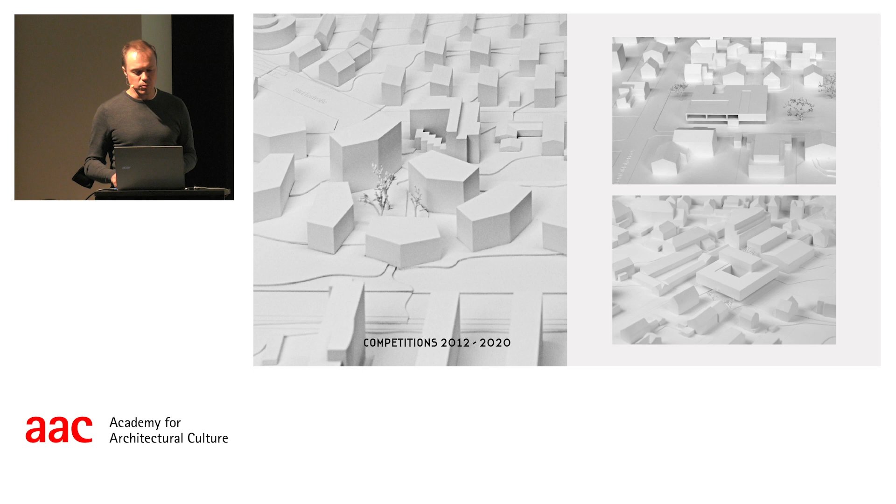We also like to do bigger things, so we enter competitions. We're not really specialized in kindergartens or offices—if it's interesting, we like to do it. Fortunately we've won some in recent years. One was the Patscherkofelbahn in Innsbruck, which was, I'd say, the first international competition we won, and from that point it turned and got easier in a way to get invited to things.

I'll show that one too because it fits the topic we have here tomorrow. Also the Kunstraum in Kassel, our first project in Germany—I was at the site this morning, so they've started building now, and it's also an interesting project for us.

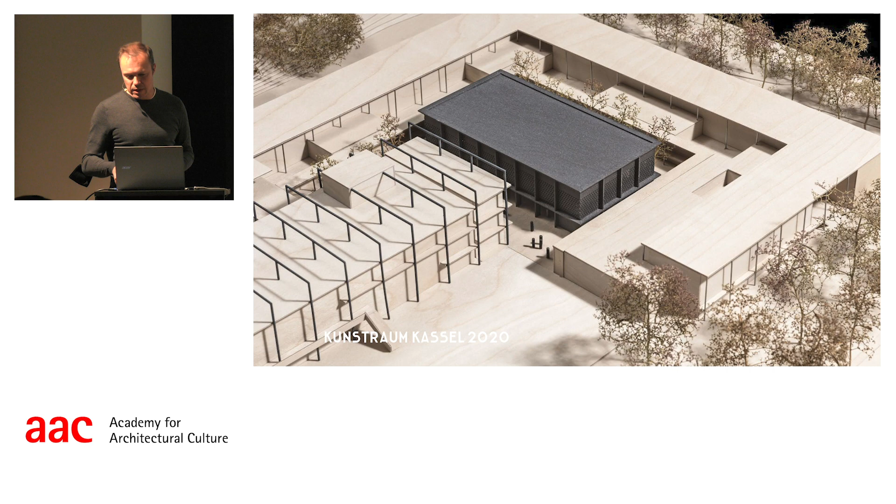So that's the topic of the lecture: in daily work we always feel that we are somehow between two poles, and our goal is to find the balance between these two extremes, to find the medium, and that leads us to lasting architecture and a high level of design if possible.

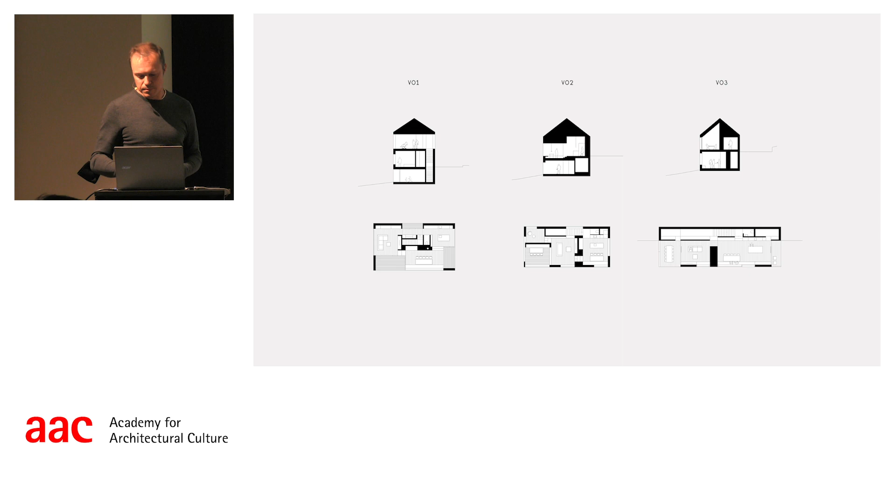We also tried to use the hill, the terrain, to deal with the terrain. That's also not so easy without the model. It's really important to make models for that, because it shows the truth, if it's working or not. And yeah, we tried to use that for us.

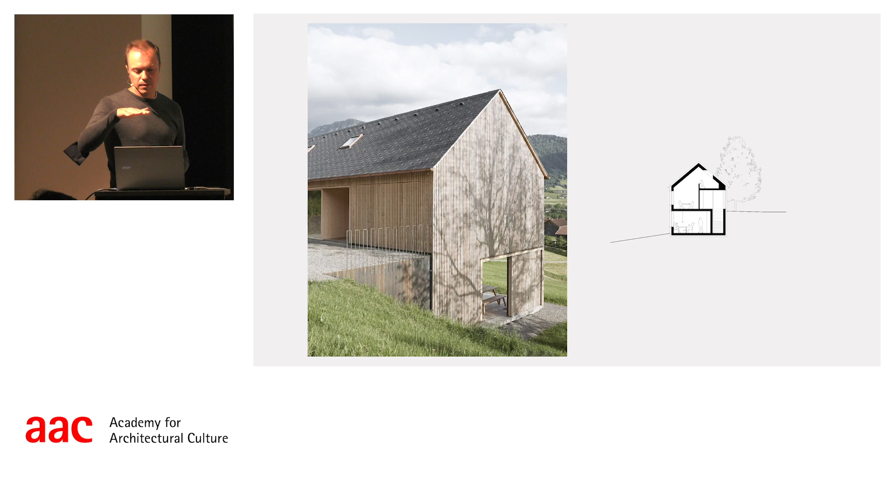So if you come inside the building, the entrance is on the top floor, and if you go to the next top floor, there are the rooms for the children and for elderly, and garage and things like that, and the corridor separates it a little bit, because the Schwiegereltern are living up there, and that's things like that you have to react on.

There's this gallery to open the relatively small rooms to the top.

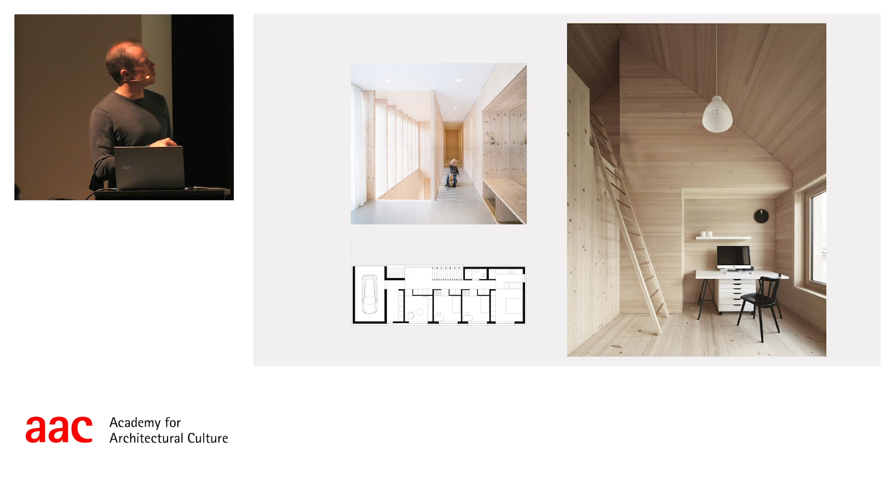The floor downstairs is pretty simple, organized again with this open space. There's an oven which separates this space. This oven, heated by wood, is actually the only heating we have, because these houses have so, I don't know, 20 centimeters of insulation, and in summer you don't need anything, and just in really cold days in winter there's this oven, and we made pipes which bring the warmth into the upper floor like in traditional houses 200 years ago.

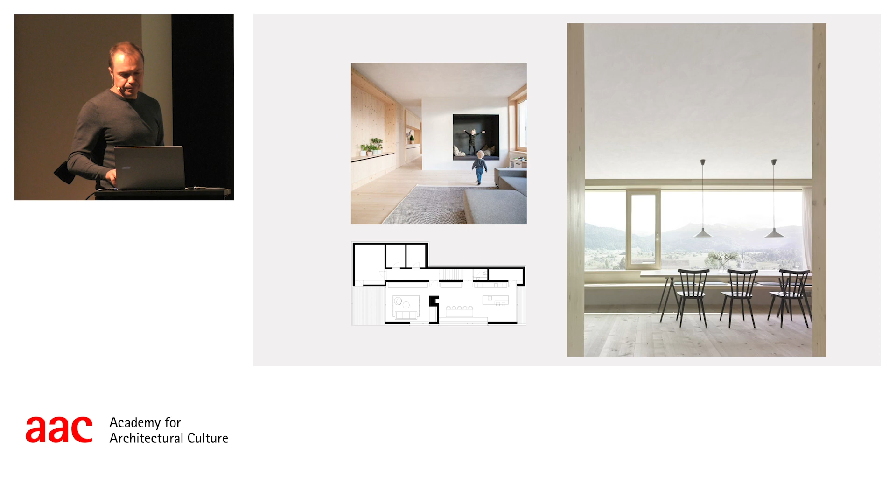And luckily the client had his own wood, so we had a lot of wood to work with. That allowed us this experiment with the facade. So we wanted more than just a protecting shell. The facade should be more like an ornament, more a little schmuck, and that makes this fine character in a way of this house.

And if you cut the wood at the right moon sign, then you can use it for almost everything. We used their own wood for construction, for furniture, for windows, for almost everything.

Also for the floor, that was the biggest discussion, because we wanted the floor completely raw, no oil, nothing, and that was really hard, but we won, and we got that floor. And what's really interesting is that now they really love this floor, because it's their own floor. You see all the bumps and things like that where the kids played or where the kids ate. There's a little bit of dirt, and with the years it's getting, the first year is not so easy, but then it's getting better and better every year, and now that's their pride. What they show first is the floor.

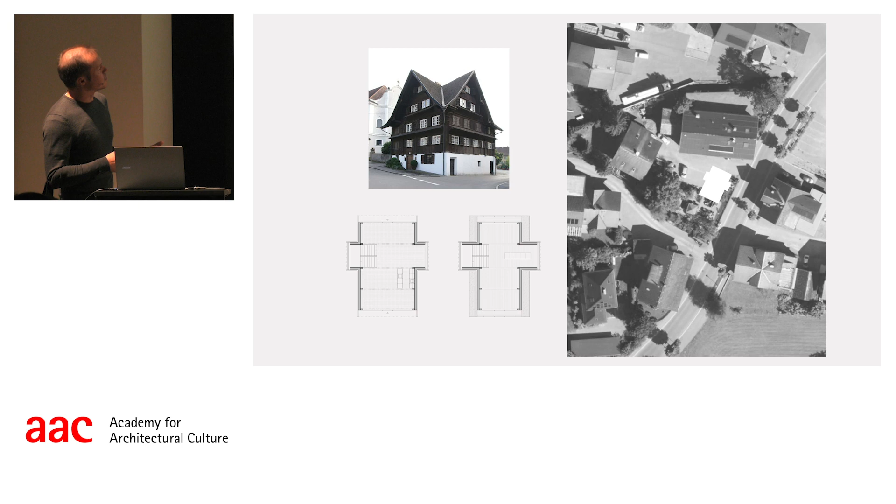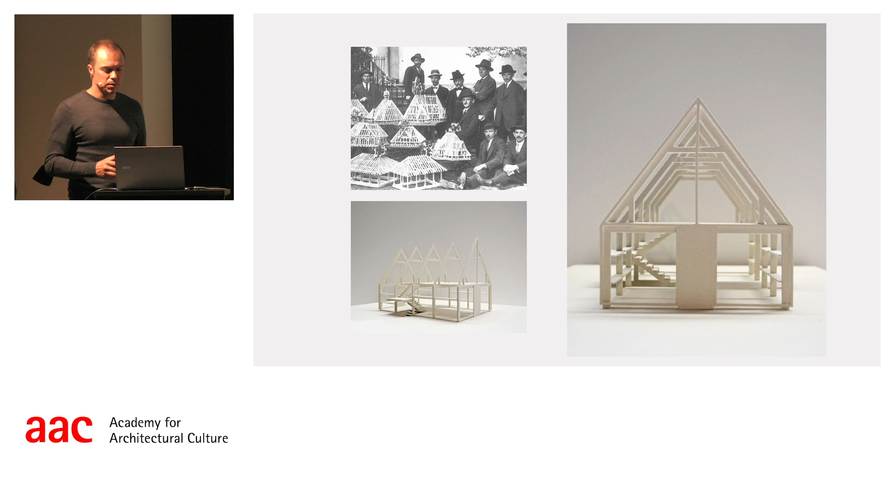What we also did is try to make it out of only cut wood, so no glue and things like that. It wasn't easy to realize because nobody is used to it anymore. So it started with the static construction and also with the carpenters, but it was a little bit difficult from time to time.

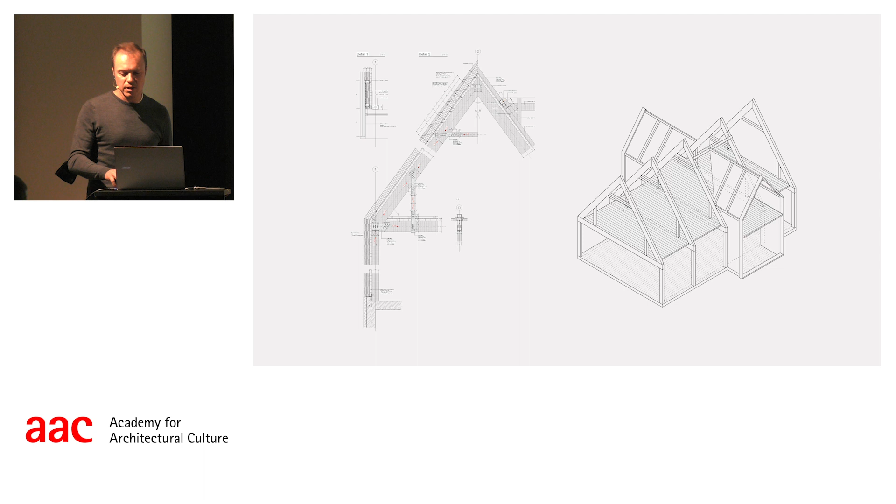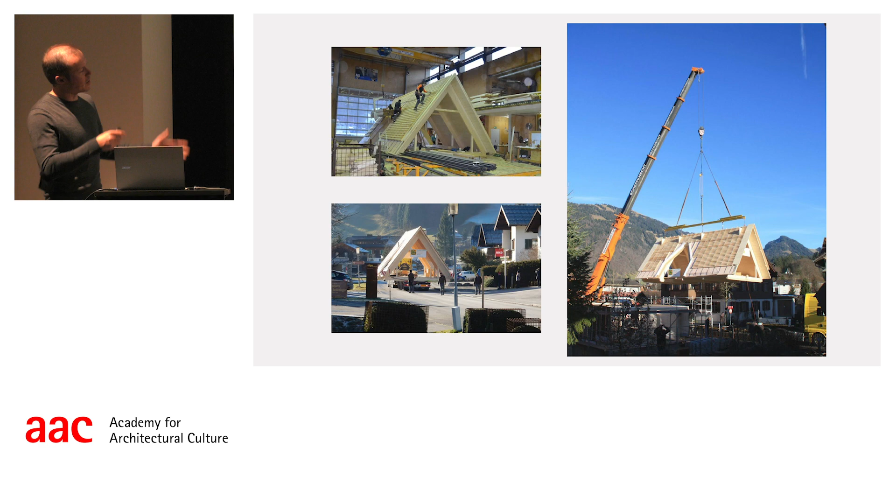And then it's finished—I think it's clear what these pictures say here. The facade is made of fir, and on the inside all the materials are completely raw again, except the steel, which is oiled. The floor is just concrete, and all the other stuff is completely raw. The connections and so on were not so easy, but it ended up really good and worked.

The Alpine Chapel was for us not a typical architectural project, I would say. It was more really hard on an interpersonal level.

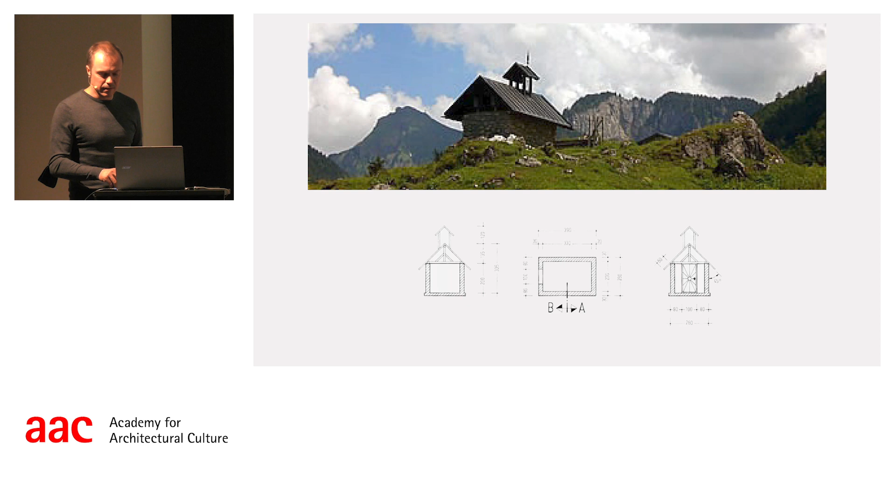That was the chapel of this Vorsäß, Wirmboden. It was built by one of these farmers in the 80s without asking the others. And in 2012 or so, an avalanche came and just blew away the chapel, and also one of these buildings was destroyed.

Here you can simply see why: here was the chapel he built on his own, and here's now the new site. He just put it there because, you know, these are all farmers, so it's not easy between all of them—he was only allowed to build it here, not somewhere inside the settlement. Since he built it outside of this naturally grown structure, it was just a matter of time.

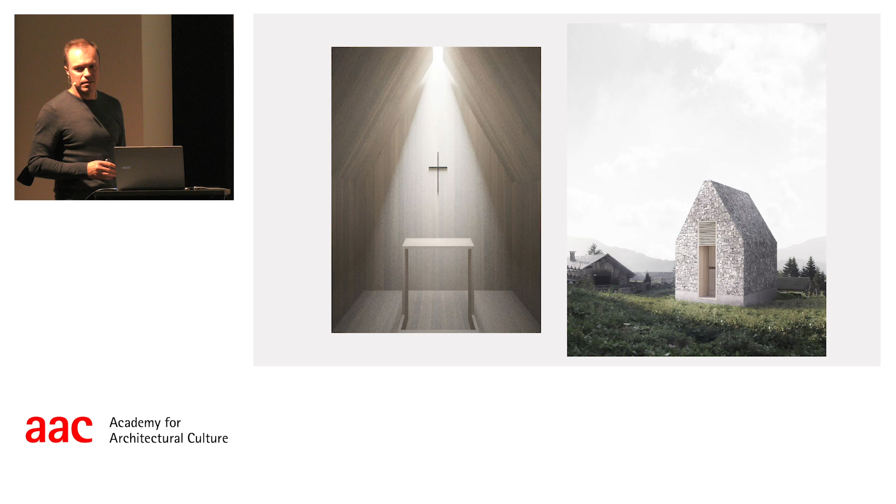So they asked us, I don't know why, to design the new chapel, and we were full of enthusiasm and also a little bit full of naivety, I would say. We wanted to make a real architectural icon up there, and that was the first design: an inner shell of wood with collected stones outside, light from above, a really clean, beautiful thing up there.

Then we had the presentation. We really made this model and things like that, and we had a really good feeling at first, like usually. But you could already see the groups among the farmers—some were pro and others were contra.

After a month or so, we heard nothing for two months. Then we heard rumors that they wanted to build a concrete bunker up there instead, which isn't possible in this area.

That's really not possible. So we had the decision: quit it, or go down from the big horse of an architect. And we went down and made a redesign.

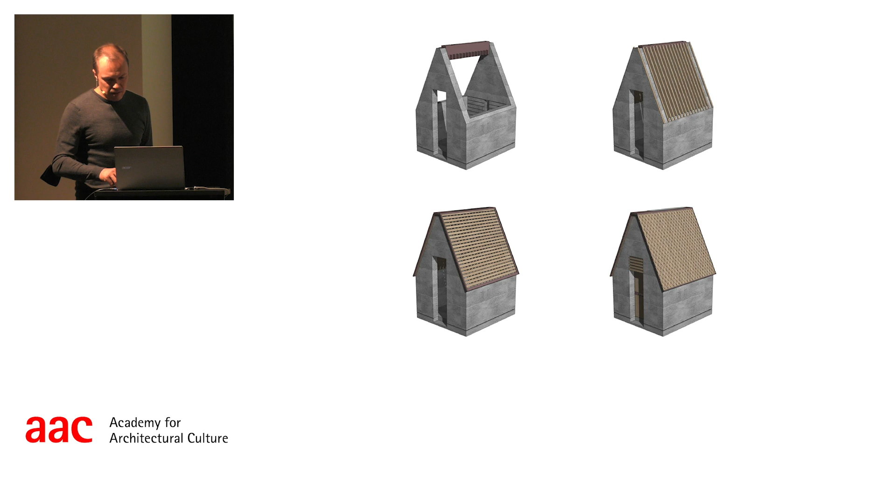So we made a wooden roof, with a little Vordach canopy. The roof should be a little more easy for them to understand and more integrated up there. But the important part was we planned it in a way that they could build it by themselves. Every detail was planned so they could do it without machines and without third parties. That was actually the key to get all of these guys.

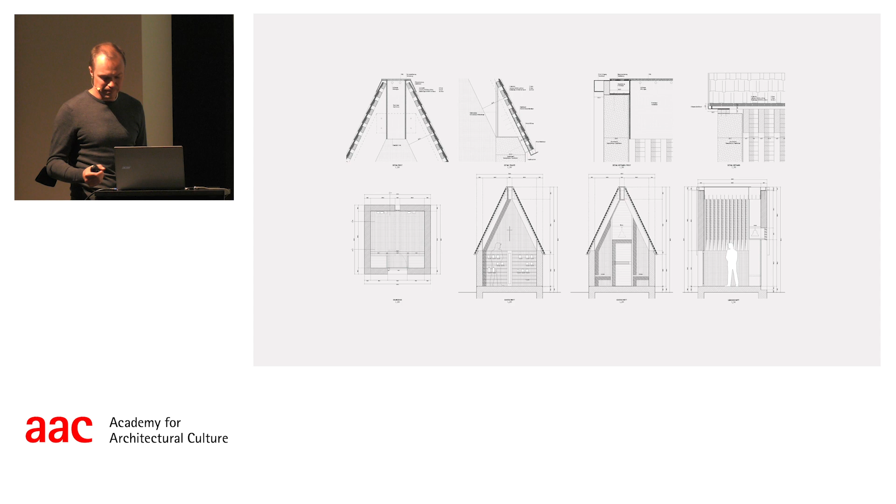Yeah, and we had to drink a lot of alcohol with them as well.

Luckily there were some guys who knew how to deal with concrete, and others knew how to deal with wood, and others had to collect stones and things like that. So we built that thing, and it got this kind of self-dynamic, you know. They wanted to show each other how good workers they are.

Then they went to Innsbruck together for casting the bell. It was really a team event up there.

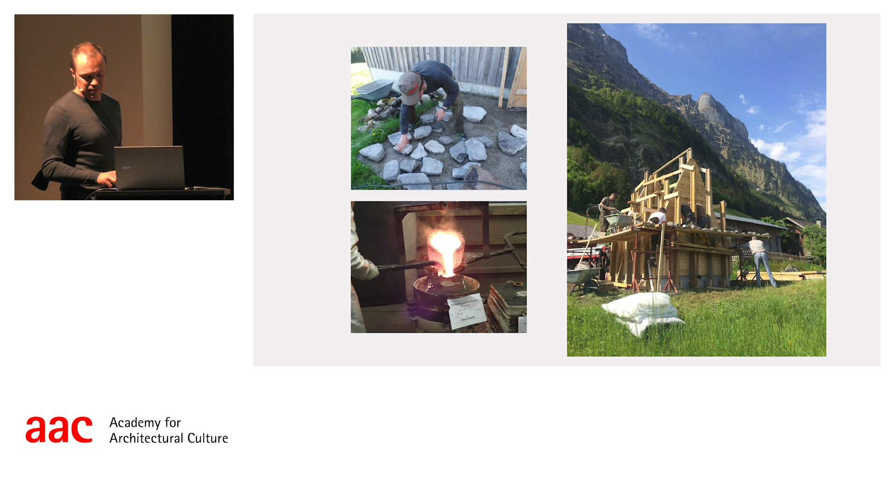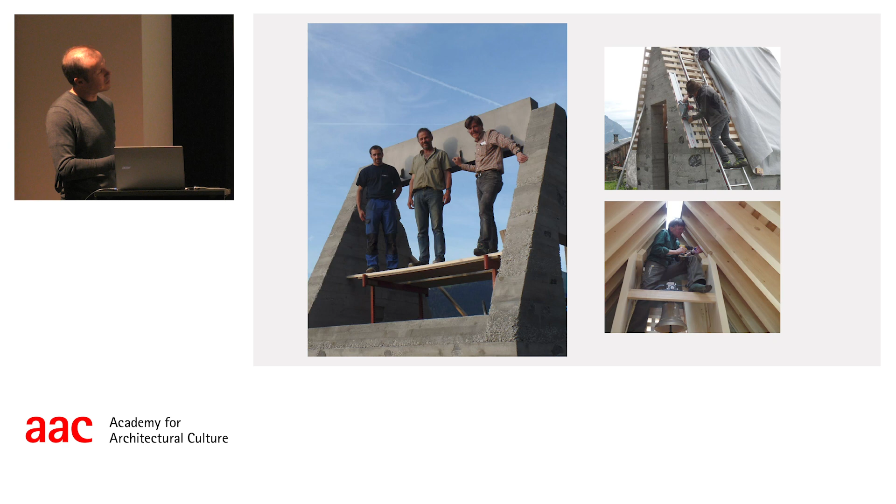Here you see the guys again. We still have the collected stones, and we were also motivated - we even designed the key.

To be honest, what's up there now - afterwards I have to say it fits better than our first design proposal, and somehow it fits better especially when it's all gray, it fits better to this place.

We still have these things here - we put paper in the Schalung and things like that. It was really a good process for us, and we learned a lot.

We still have the roof with the light from above, this skylight. We didn't want to make a tower for the bell, so it's integrated here from the inside and from the outside.

It ended up really good, and most of the people are happy up there. For us it was an interesting process.

The Patscherkofelbahn in Innsbruck - I put that one in because it's completely different concerning landscape, hills, and buildings. It consists of 3 buildings: the lower station, middle station, and the top station.

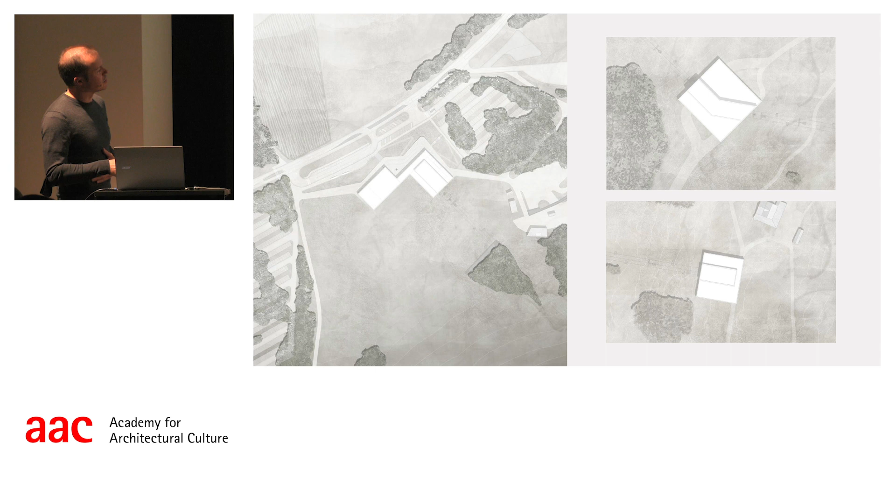How to explain - building in the landscape is always an Auseinandersetzung between the typology of the building and the topology of the landscape. In this case, we wanted to create buildings that, because it's a cable car, shouldn't cover something. We wanted these technical buildings to strike through with clarity and simplicity in the landscape, if I explained it right.

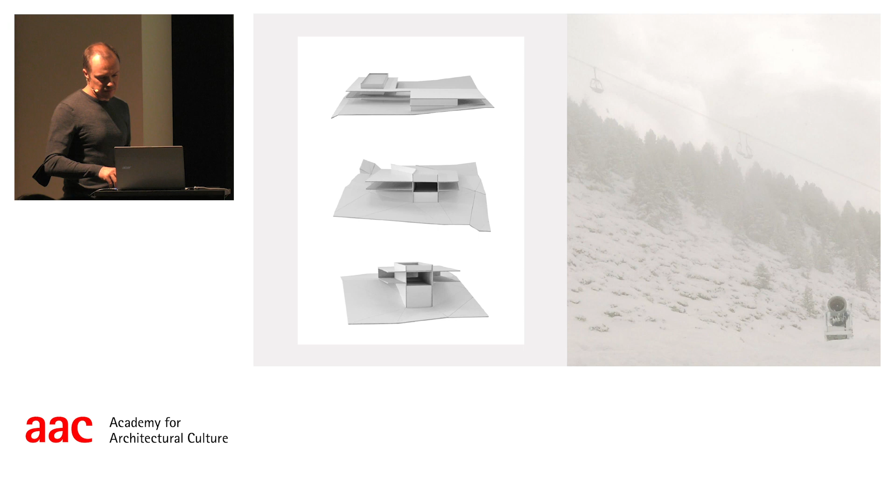So the concept is really simple. In the vertical there is all the technical stuff, like the cable car and technical rooms, storage as well. Always in the horizontal, there are the spaces for the visitors. The material concept is also clear - the outside shell is concrete, a hard shell with different Bearbeitungen, and the inner space, these plugins, are soft and out of wood.

The Stadt Innsbruck was our client, and it was really good. We made a lot of mock-ups and things like that. But we had not only friends there - that's also something we realized with bigger projects, that there are not only friends there.

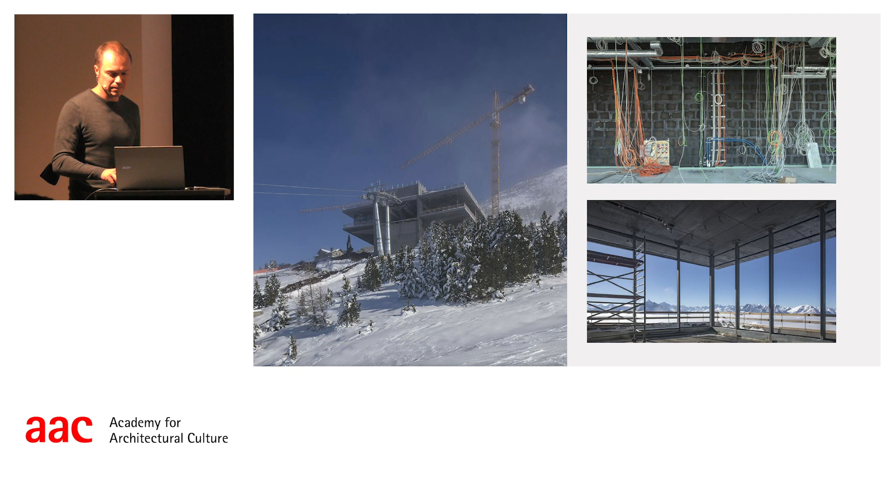Yeah, it was not so funny actually, but in general it was a hard project, because the winter came too early that year, and the glazing wasn't inside yet and things like that. But yeah, we managed it.

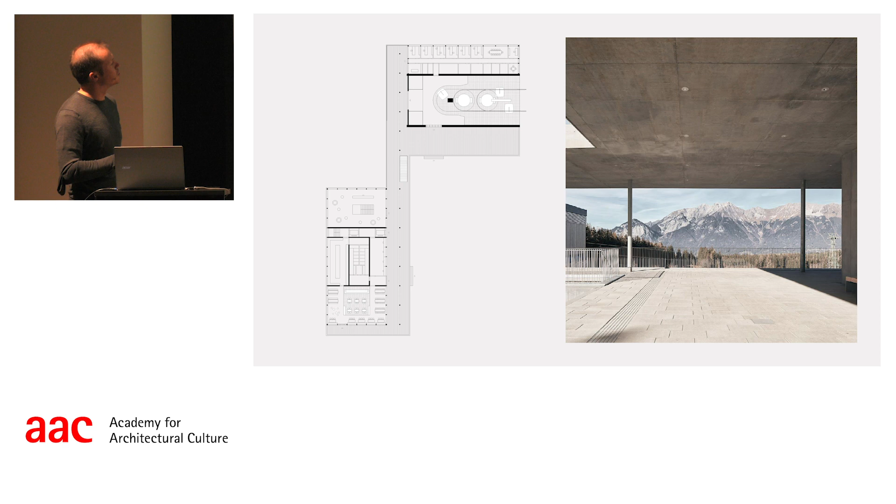It's finished - that's the lower station. For us it was important that the visitor had really simple orientation: here's a restaurant, and here starts the cable car to the top. You know that one from the chapel - we used it again here as a ceiling.

The small one was the prototype. The middle station is the technical heart - here's the engine, and here's also the garage for all these cabins. It's about 80 cabins, which when it's closed are parked inside there, so you get a really big volume.

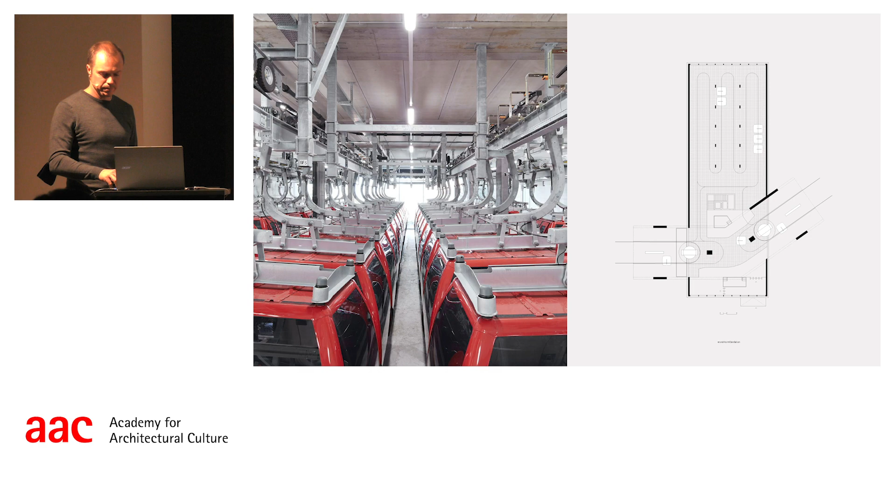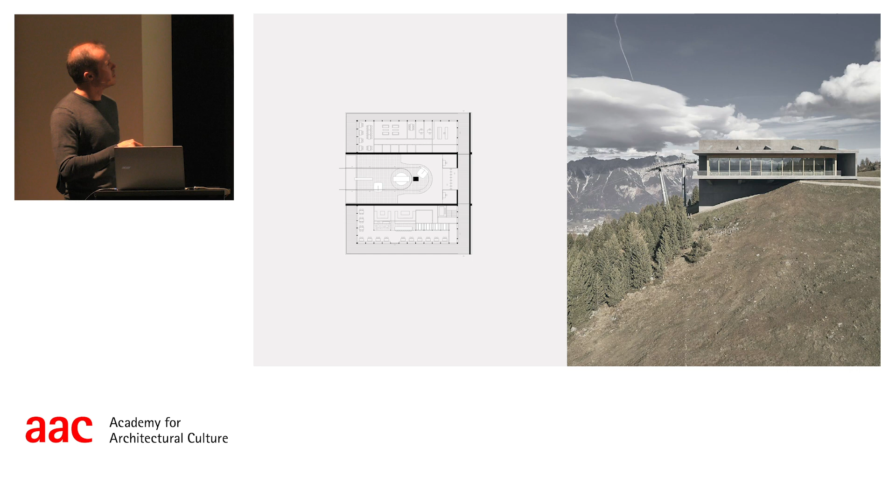It's a completely different approach to the House for Julia and Björn also. And again, pretty clear orientation - here's the restaurant, the south part, and at the north part there are offices and things like that.

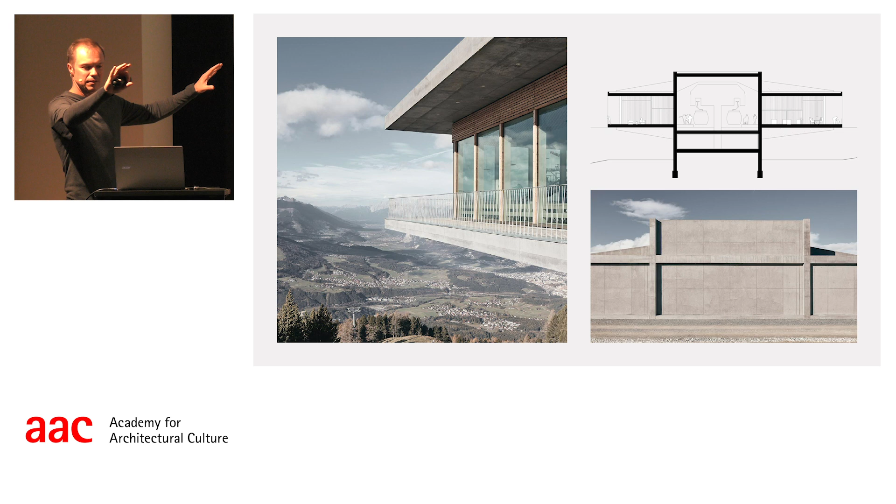It's really nice up there, actually. If you are in Innsbruck once, you see to the Nordkette. Normally all the tourists go up to the Nordkette, but they don't see the Nordkette itself - that's the problem, because it's really nice. So it's on the opposite side of the Nordkette.

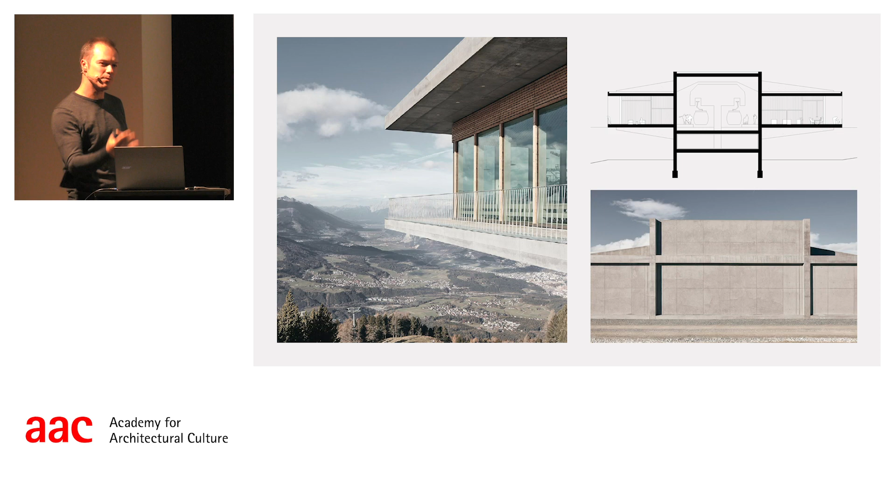We went really into detail as well, we made our own furniture system on the terrace and also on the inside, and that was really important for the project because the outer shell was really hard, and then you go inside, it's soft and detailed. It was important in the restaurant to create different spaces, different feelings inside, higher parts or lower parts, so that it's not just one of these big ski restaurants.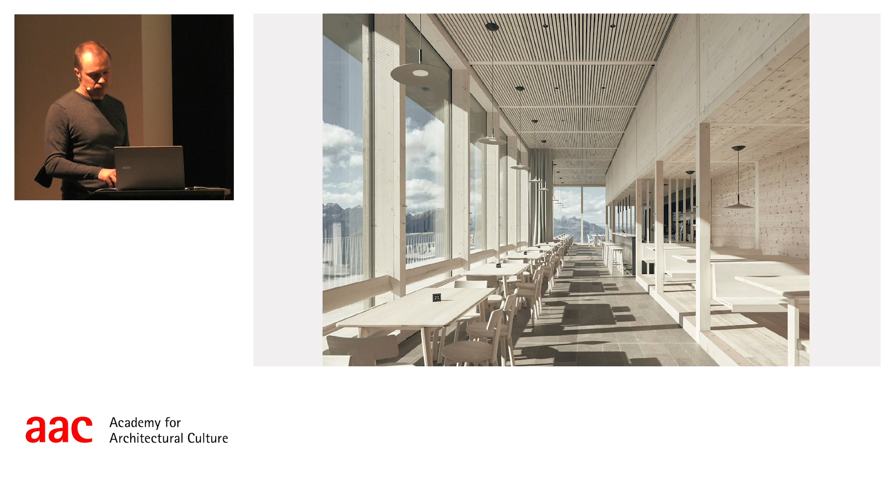We went there last winter, and for us it was really, we were really happy to see that people like it. I also spoke to the guy who runs the restaurant. 80% of the people are guests from Innsbruck, so probably one of these guys from before is up there. For us it was important to see, after the troubles at the beginning, that people really like it.

Okay, the last project, it's in Kassel, at the Kunsthochschule Kassel. There's a really nice existing building, I think from the 60s, from Posenenske. The existing building has a really clear structure, a clear grid through the whole building, and the materials are direct and raw. When I went there at the hearing, I really liked it.

The task of the competition was - the existing building surrounds a courtyard - to make inside this courtyard an exhibition space for the university. It should be flexible and usable, so for exhibitions for sure, but also for lectures, workshops, and things like that. We wanted to work with this grid, and also with the direct and raw materials of the existing part.

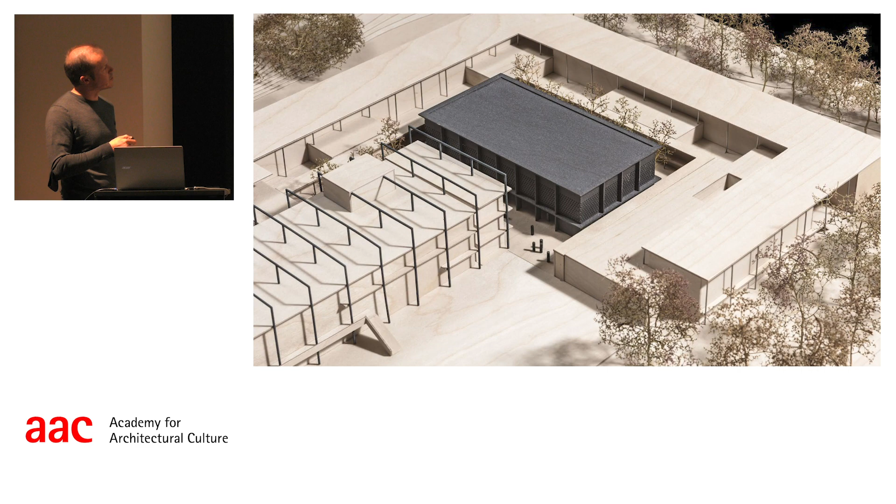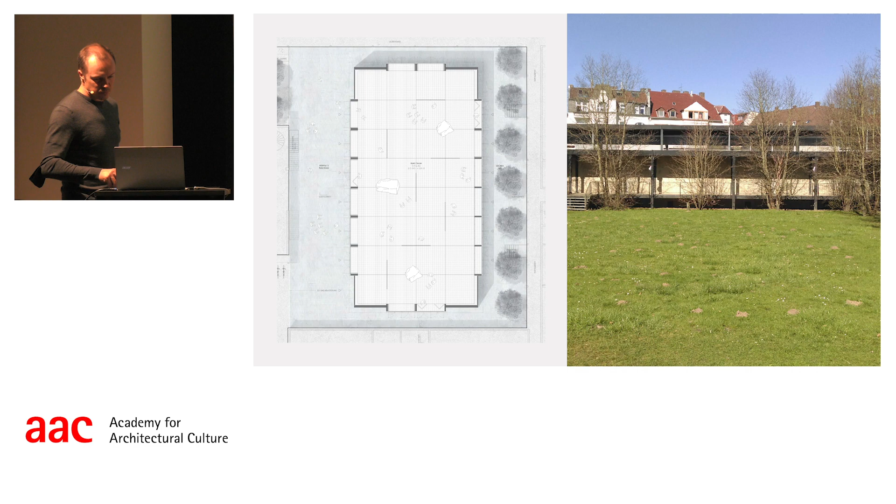Here you see the floor plan. It's really just one space, and you can open it to all four sides. The outside spaces have different qualities - a bigger one here, a smaller one here with trees. On the inside there are only movable walls, which you can move completely along this grid. Through that it's completely flexible.

That was the rendering from the competition. The lower part you can open completely, as you see in the floor plan. In the upper part, we made this - we thought in the competition it would be cool if we made just a 30 centimeter thick plate of wood, then screwed in holes and put glass things inside, so we'd have diffuse light from the top. For the competition, you can completely close it on the bottom.

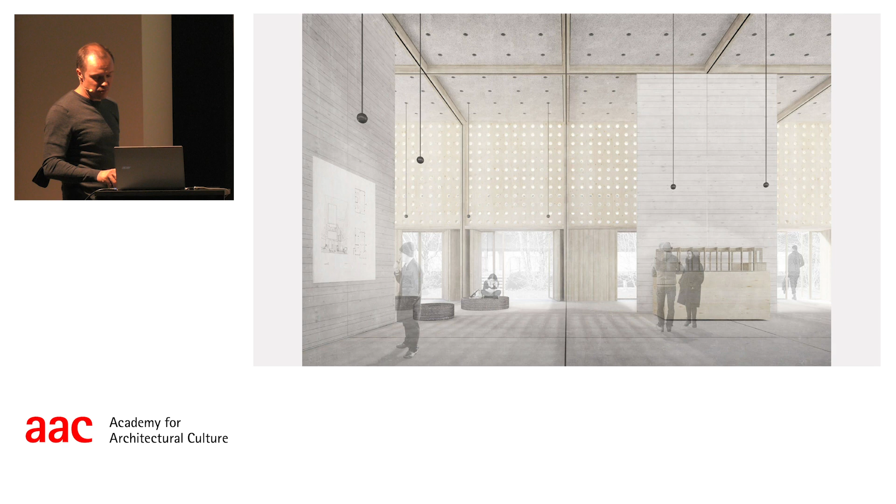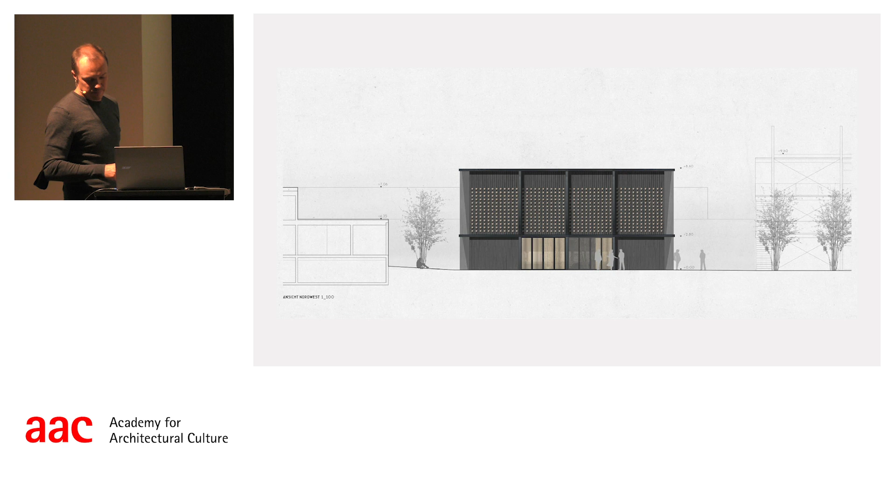Then we won, and we had to think about how to actually make it. That's from the outside - now we have a little bit fewer of them because they're not so cheap. Here you see, now we have 49 per field. We still hadn't figured out how to make these things.

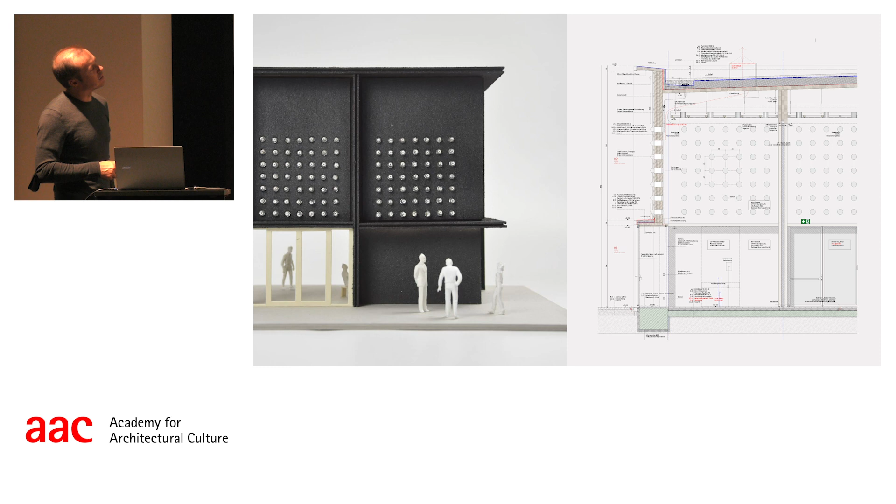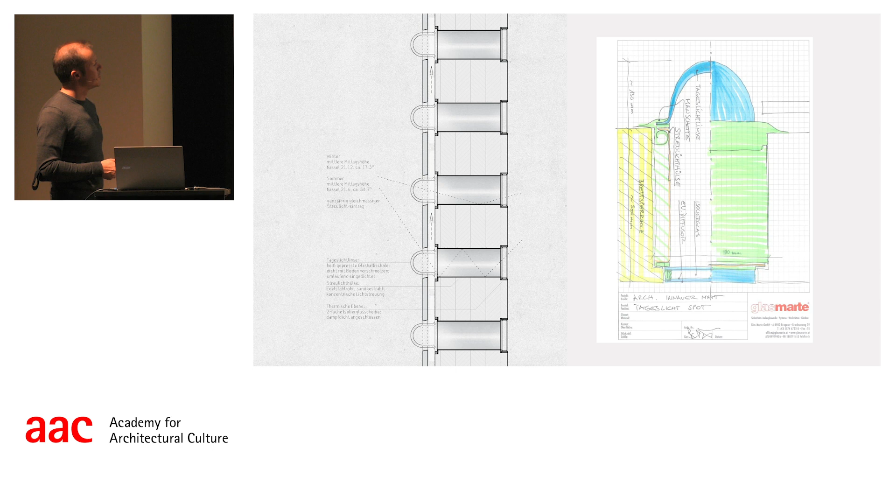So that was the plan from the competition - we just said okay, there's light coming, there's a reflector, and then it goes inside. There's only one piece of wood, 30 centimeters, and that's the insulation and all - that's all. We were really surprised, but it worked.

So we made these things in different forms, and then Glasmarte, a firm from our area, put them together. There's an insulation part inside too - it's a tube like this, and you put it in as one piece, then just glue it and fix it. We hope it will last forever. The prototype was mouth blown.

That was easier to make, but now it's pressed instead of mouth blown. If we had 100 pieces, mouth blown was okay price-wise, but if we have more than 100, then it changes to pressed glass. That was the prototype, the mock-up. Here you see without insulation, and the Hinterlüftung - the air behind the facade.

Here we tried these different types. Now we're making the middle one - it's the most special and looks best. That's the one. Also on the inside, from opaque to other glasses, we tried different reflectors and things like that. Now these are in production, and in November the whole hall will be constructed, and hopefully it looks good and works.